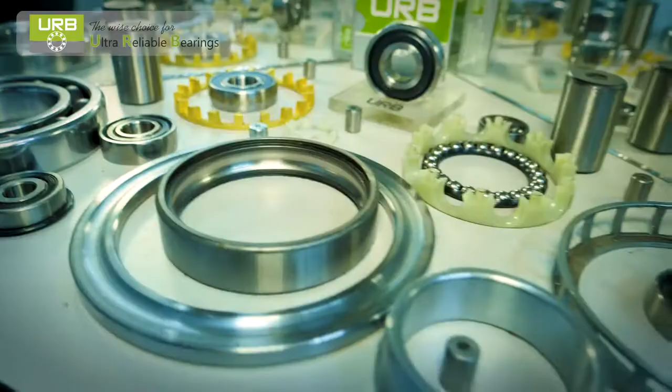Rulmenti SA Barlad is one of the largest manufacturers and suppliers of bearings and bearings-related services in Southeast Europe. It has over 60 years of experience in the global market and has developed a reputation for innovation and quality. The company produces and distributes a complete range of products and bearings under the URB brand.

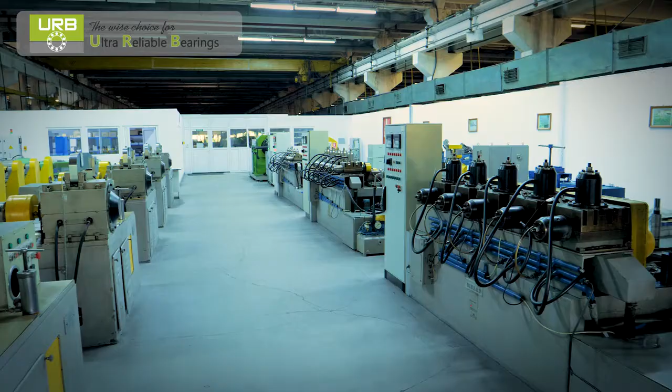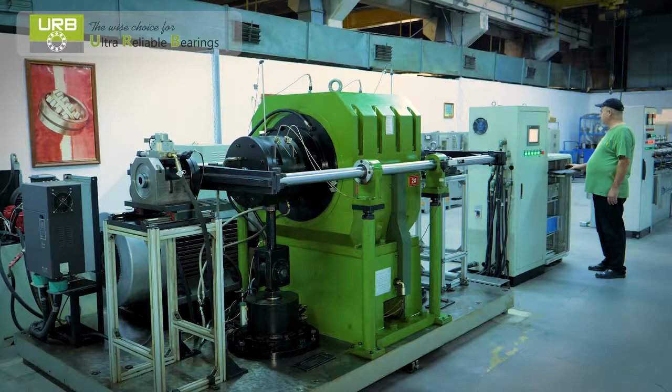The production process starts in the research and development department, where bearings are designed, analyzed, and introduced into simulation sequences with the use of various specialized software like ANSYS, MESYS, or Creo Parametric. Rulmenti SA Barlad also has a bearing testing laboratory that includes single post test stands and multiple post test stands in order to conduct multiple types of standard tests: durability, startup, friction, and grease loss tests.

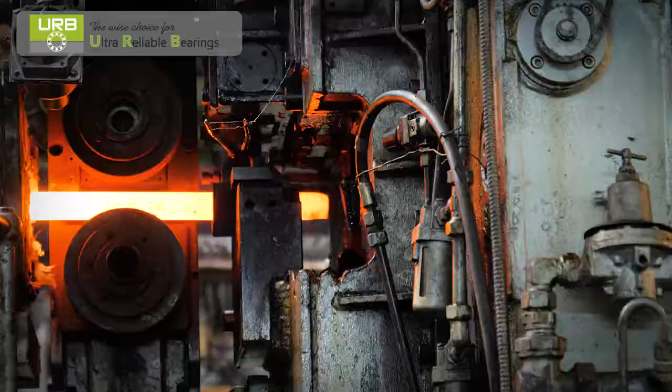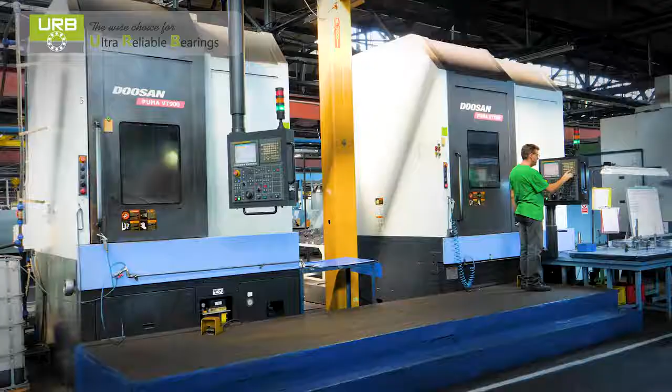The chemical composition of the raw materials and bearing components is analyzed in a dedicated laboratory. The forging process is carried out on forging lines and also on rolling mills equipment. The primary heat treatment is carried out on new and upgraded annealing lines and monitored by an advanced online system. The forged rings for the bearing components continue the process by turning operations on different types of lathes according to the design and size of rings.

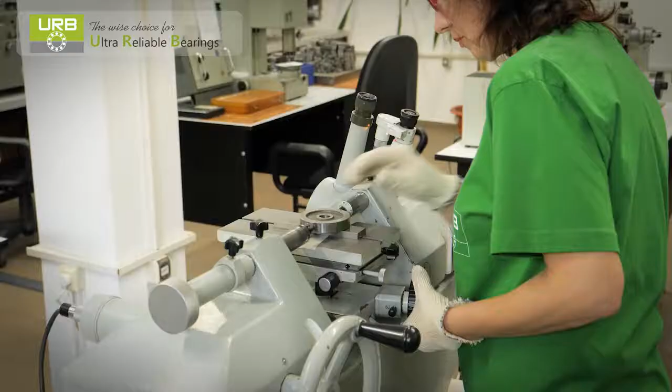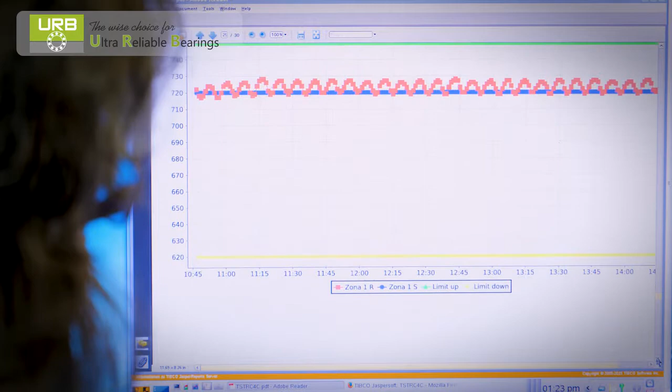Precision measurements and checks of bearing components are carried out on different equipment types: length measuring machines, industrial microscopes, and profile projectors. Secondary heat treatment is carried out on production lines with electric heating and automatic operation. Also, the line is equipped with process computers and an online monitoring system of the treatment process, which have the capability to continuously check the process parameters for each product or process part and to save and archive the data and parameters of the heat treatment process.

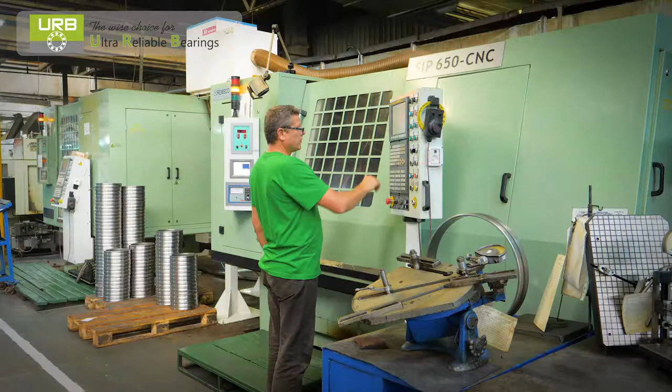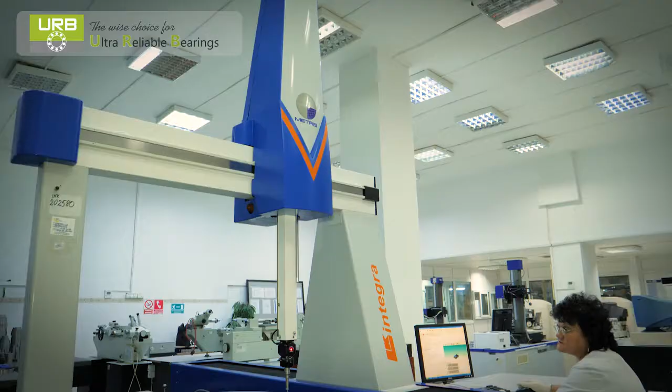The grinding process for bearing rings is carried out on lines of grinding machines or on individual CNC or modernized grinding machines equipped with in-process control devices that ensure continuous checking of the ring's parameters. The 3D coordinate measuring machines and the universal measuring machines provide high precision and accurate measurements of lengths, diameters, threads, and angles of the tested parts. Before the bearings assembly process, all bearing components are dimensionally and geometrically checked on passive control devices.

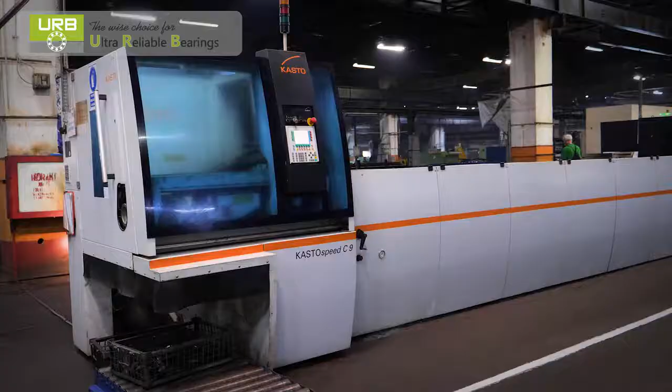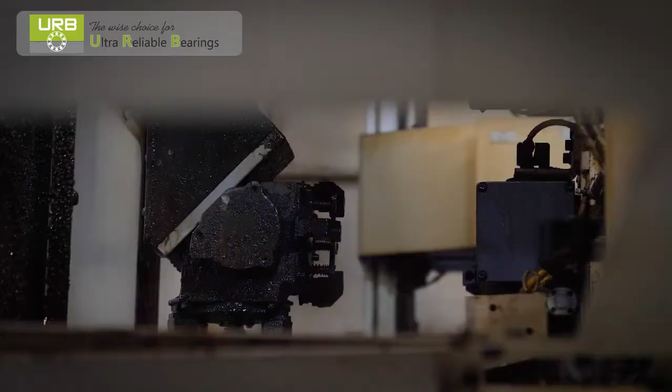The roller manufacturing process is carried out on press machines or CNC lathes and continues with grinding operations at the end sides and rolling surfaces on grinding machines simultaneously. The secondary heat treatment of the bearing rollers is carried out on upgraded hardening and tempering lines, equipped with process computers and online monitoring system for continuous monitoring of the heat treatment process.

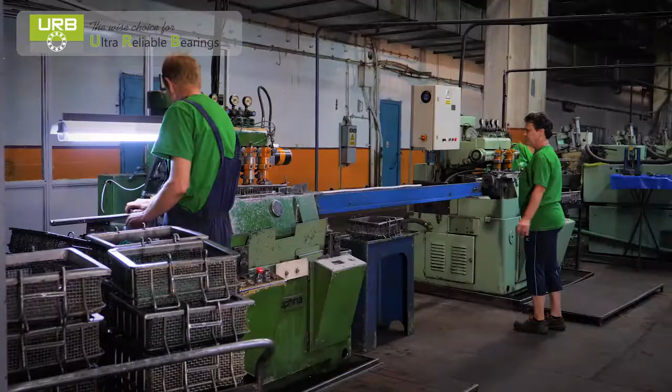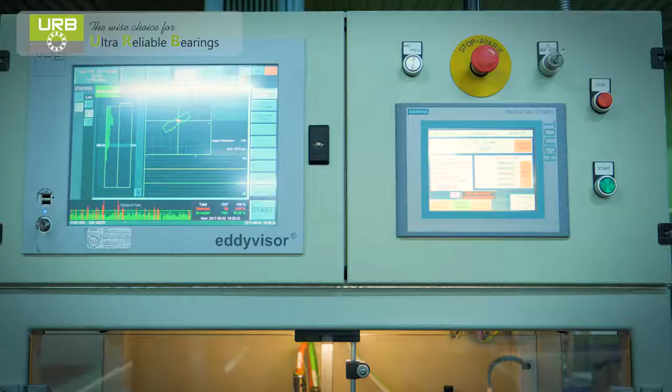The grinding process for bearing rollers is carried out on lines of grinding machines or on individual CNC or modernized grinding machines. For the final inspection of the bearing rollers, some non-destructive ultrasonic, eddy current, and magnetic particle testing equipment is used. Roller sorting is done on automatic roller sorting machines according to their diameter and length.

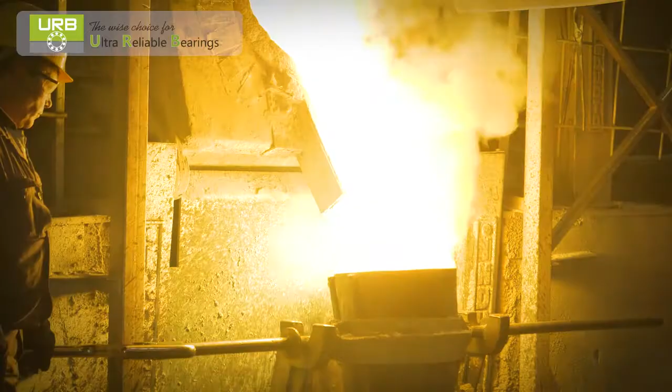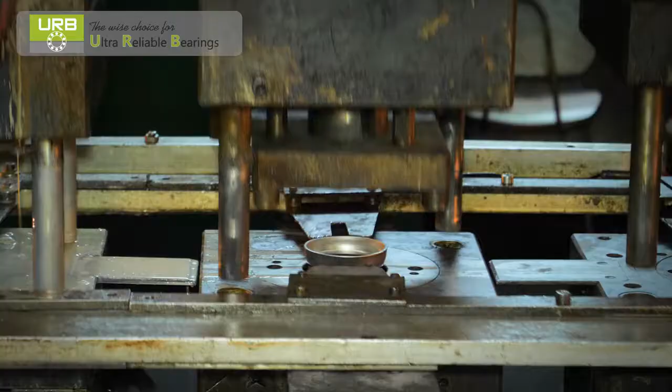The manufacturing process for brass cages includes brass preparation and melting equipment, centrifugal casting machines, and machines for mechanical processing by turning, milling, or drilling. The manufacturing process for steel sheet cages is carried out on multi-post pressing or on individual pressing machines. Bearings assembly technology is done manually for all bearing groups. After inserting the rollers separately in each cage, the bearing is assembled and radial clearance is checked.

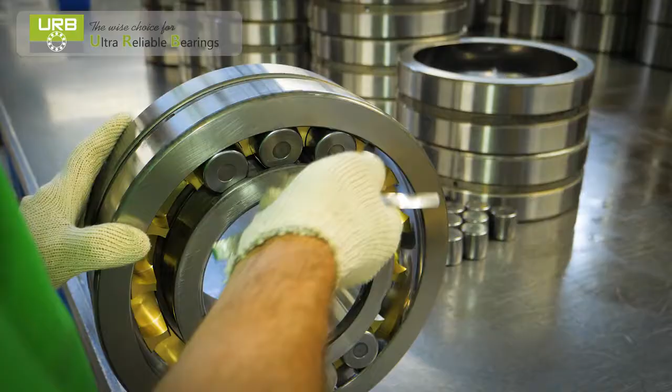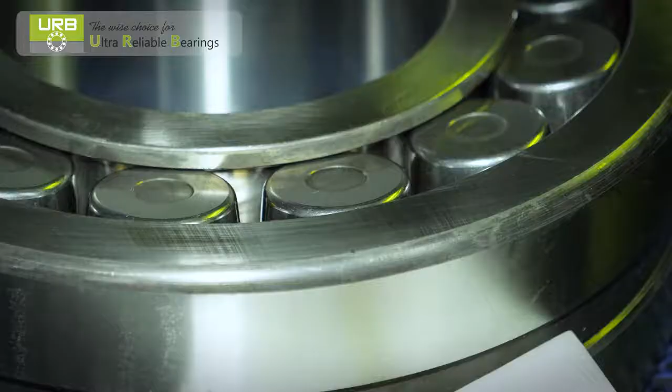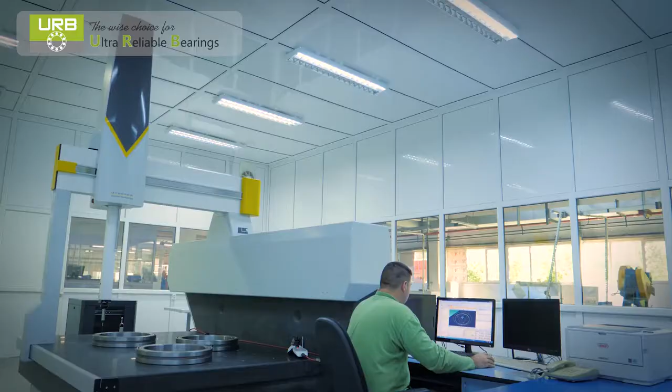After the assembly and final inspection operations, the last stages of the bearing manufacturing process include the marking, washing, and preservation, packaging, and storage of the bearings. An important feature of the bearing marking process consists in the application of the trademark symbol and also the application of an ID code on each bearing for unique identification and to guarantee to the customers the originality of the bearings. The dimensional inspection of the assembled bearings is carried out on a 3D coordinate measuring machine. The packing of the products should comply with provisions, technical specifications, or special customer requirements.

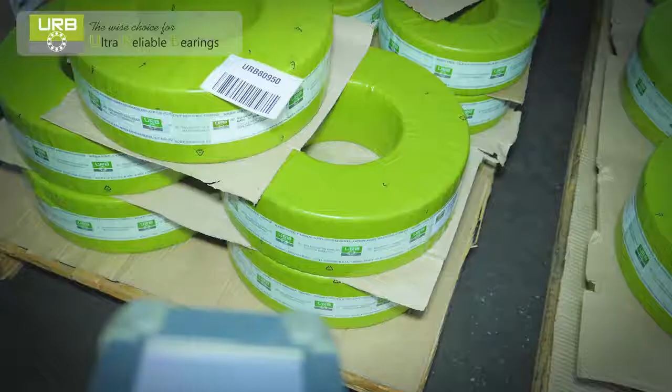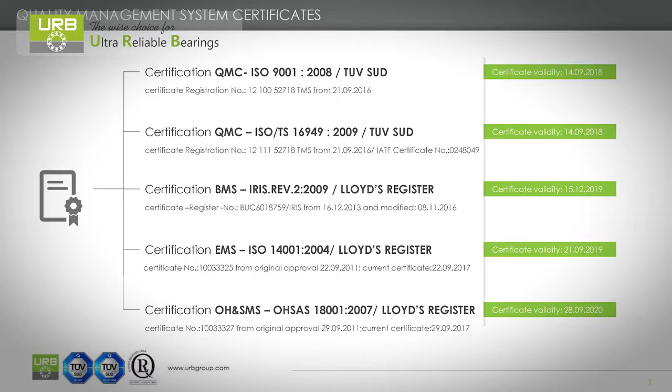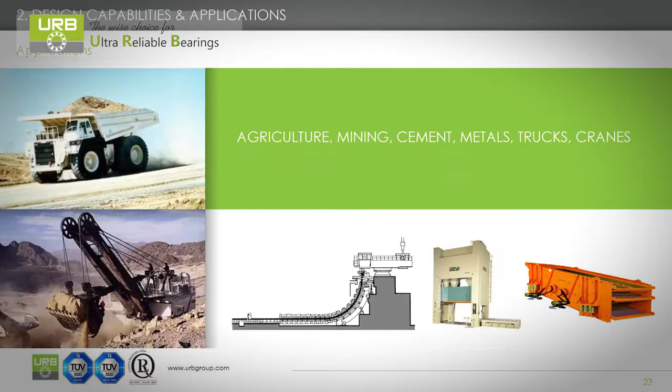The company has implemented and maintains an integrated management system, including certifications according to quality, environment, and occupational health and safety standards. The quality management system is also certified according to specific standards for the automotive industry and international railway industry. Rulmenti SA Barlad produces bearings for use in a wide range of fields, from agricultural to petroleum or heavy industry, and has a distribution network of more than 40 countries all over the world, with Europe, Middle East, and North America as main areas of distribution.

Rulmenti SA Barlad is your reliable and professional partner and URB brand bearing supplier. Our bearings continue to be the wise choice for ultra-reliable bearings.